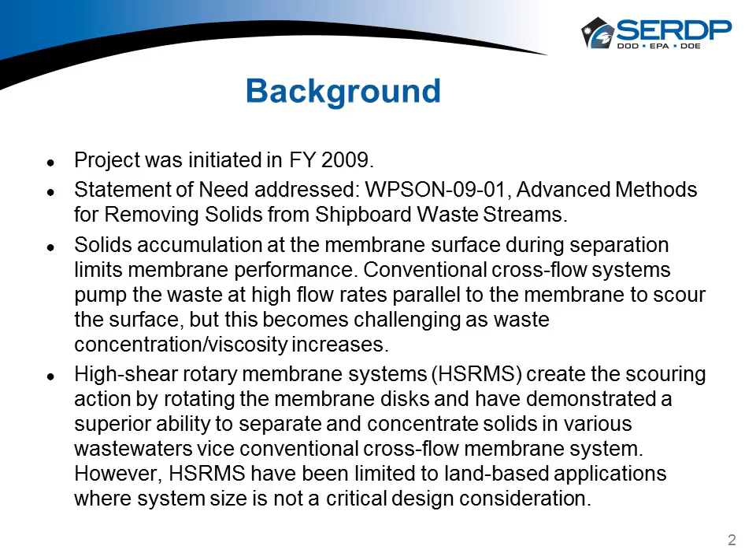Using what we had learned, we would conceptually design, fabricate, and test a prototype shipboard HSRMS that would incorporate whatever combination of backpulsing, continuous surface cleaning, and larger discs that would work best for the different waste streams. Our goal was to produce a prototype shipboard rotary membrane system that would have increased waste treatment throughput, a smaller footprint and space requirements, and also be potentially portable.

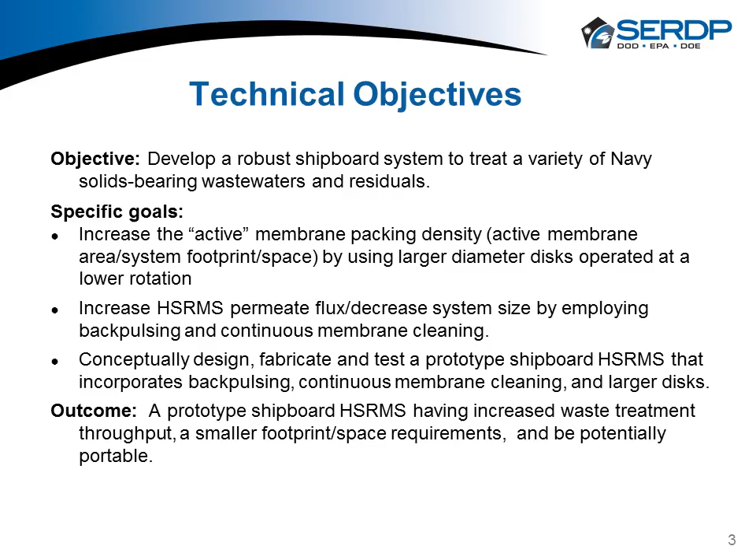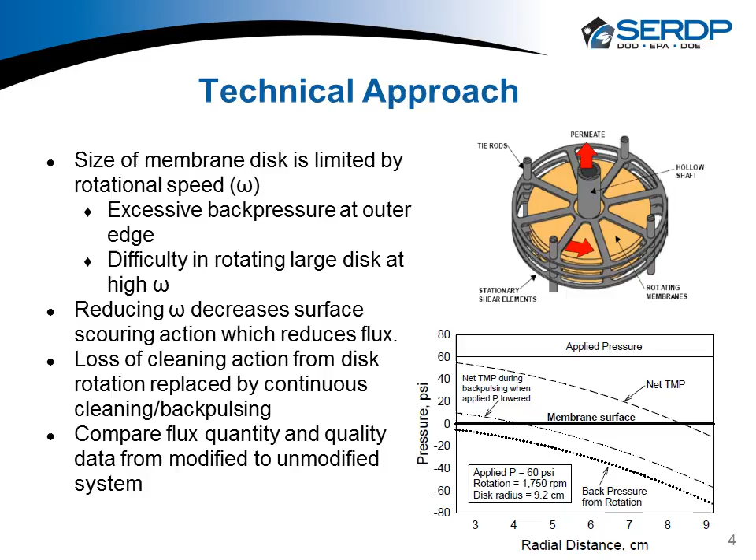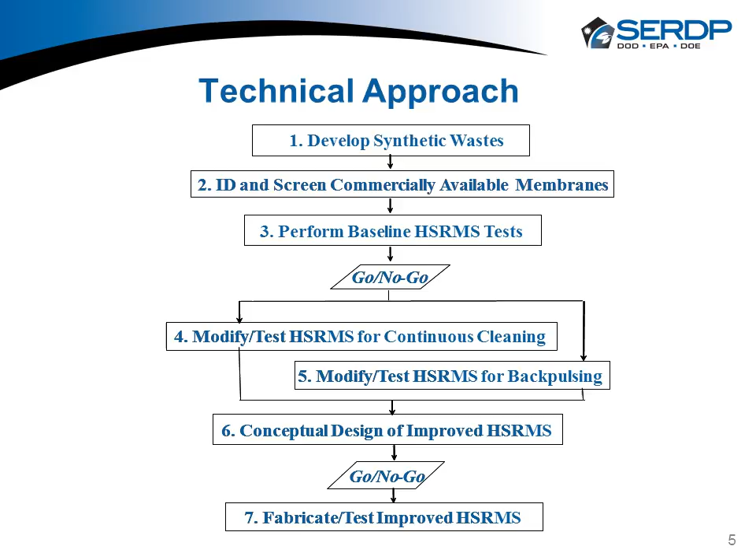Slide 5 shows the rough outline of our project. We started off with choosing the synthetic waste that we would evaluate our system on. We then identified and screened commercially available membranes. The membranes that showed potential moved on to high-shear rotary membrane system tests, baseline as well as the continuous cleaning and backpulsing. Taking what we learned from the previous tests, we then came up with a conceptual design of an improved rotary membrane system, and then we fabricated and tested a prototype of that.

For our technical approach, for each set of conditions that we were testing, we did a minimum of 3 runs. While we did these runs, the system was typically in recycle mode, where the permeate was returned to the feed tank. We cleaned the membranes between each run to return it to initial performance, and we used a 2-step process recommended by the rotary membrane system manufacturer, which is SpinTek.

Early on, we were doing separate runs for each condition, each rotational speed, each modification. Midway through the project, we realized that we could reduce the number of cleanings by switching to a rotation step-down method, where we start off at the highest rotation for a given set of conditions and then step it down, each time waiting for flux to reach steady state before switching to the next rotation.

The things we're measuring were permeate flow and quality. For permeate flow, we initially used a magnetic inductive flow sensor because our flow rates were high enough to be read. We verified the accuracy at the beginning of the project, and it worked well. But once we switched to the smaller discs later in the project, the ceramic discs, their permeate flow rate was too low.

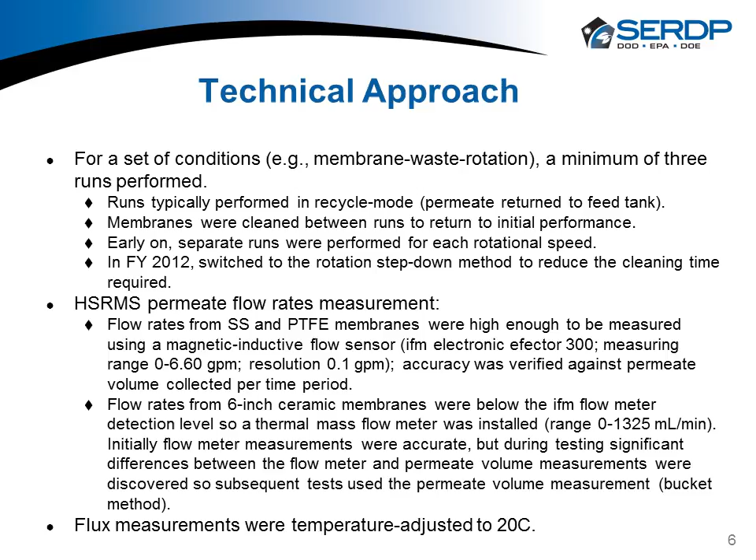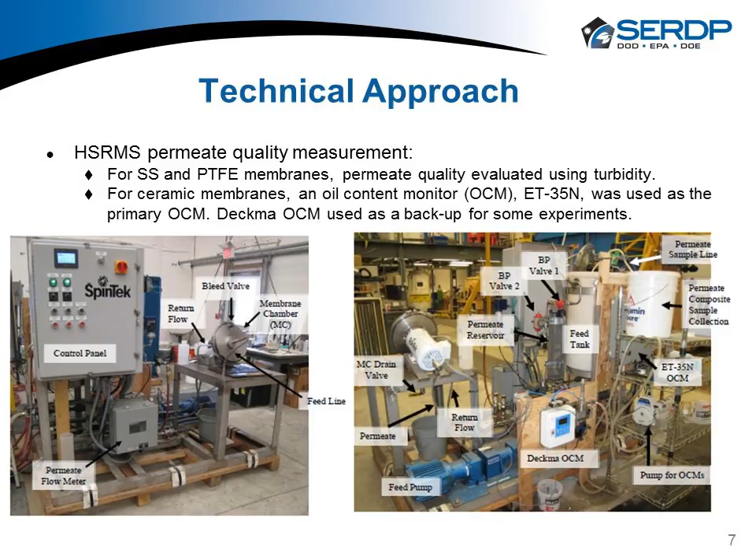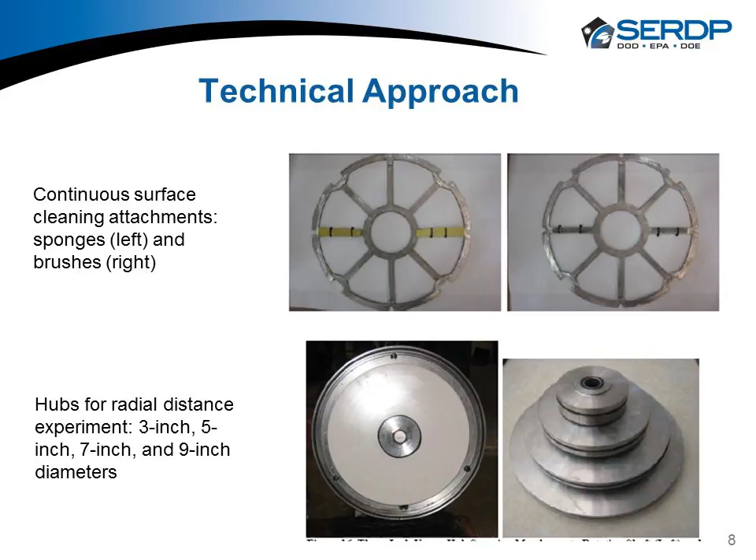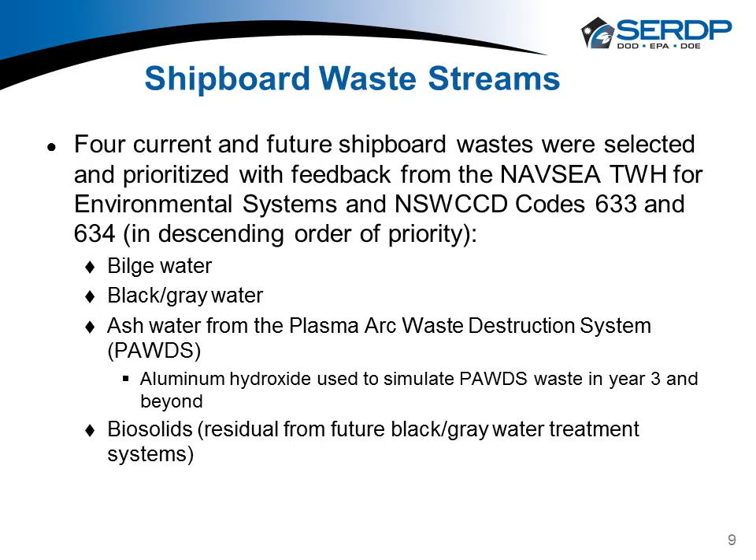Slide 10 shows some of the waste characteristics, the discharge limits, and also what the environmental tech warrant holder and Code 633 and 634 identified as the potential applications for the rotary membrane system.

For bilge water, they thought there could be two opportunities for it. It could either be used to treat bilge water to the discharge limit of 15 ppm of oil or less, or it could be an add-on to the current shipboard systems, further concentrating the oily effluent from the current systems.

For our test, we used the oil, detergent, and particles bilge water mixture that Code 633 uses to evaluate their systems. The recipe is shown there - that's what we call 1X. That was what we primarily used, although for some tests we wanted to see what a higher concentration would do, so we used 10X concentration, which is basically 10 times what you see there.

For black-gray water, they saw the rotary membrane system as a way to remove solids prior to the treatment system. For the PAWDS ash water, also looking at it as solid removal before discharging the ash water to the sea. And for biosolids, they saw the opportunity as being able to dewater the sludge that would come from future shipboard systems.

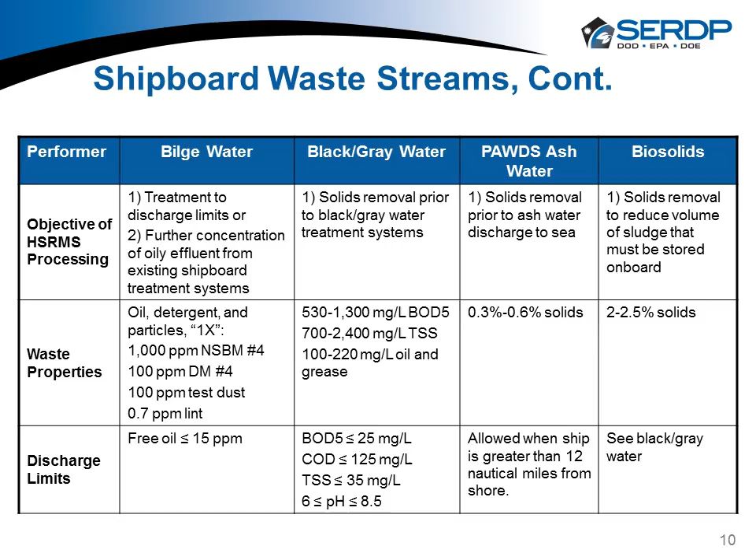Slide 11, we identified and screened a variety of membranes. For the first 4 membranes, the PTFE and stainless steel membranes, those are available as sheet membranes, and we evaluated them using a stirred cell, shown on the right. For the 6 ceramic membranes made by KERAFOL, they come as discs already, in 3 sizes, but only the smallest size, the 6-inch diameter disc, would fit in our rotary membrane system, so we screened them in the rotary membrane system using the 6-inch disc.

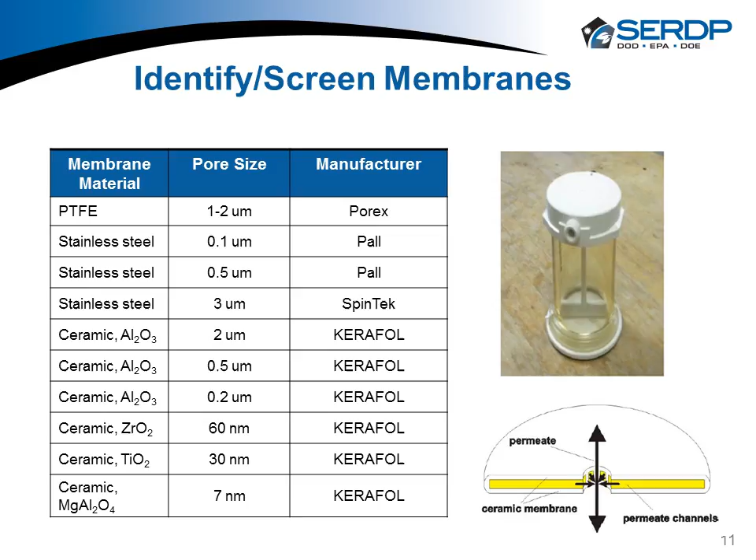Slide 12 shows the results for the PTFE and stainless steel membranes in the stirred cells, and as you can see, they all performed similarly and had good permeate turbidities. Based on that, we moved them all forward to rotary membrane system evaluation.

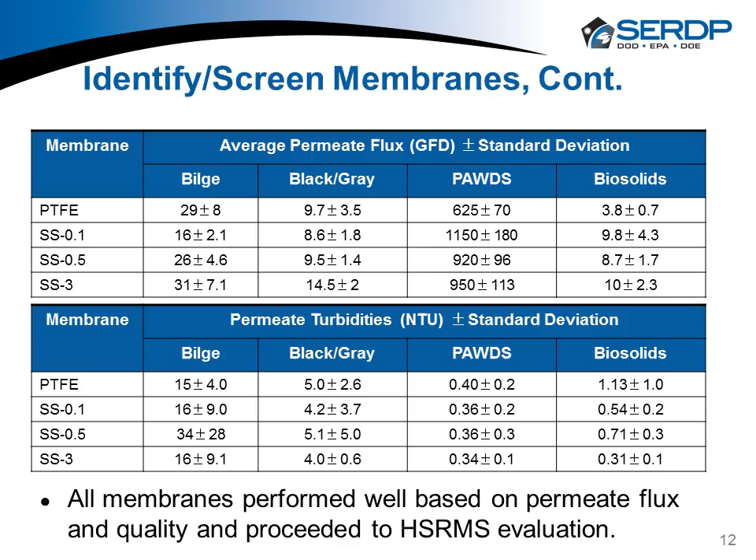Slide 13 shows some of the results from the 6-inch ceramic membrane. The graph shows the results of backpulse testing, which we rolled into our baseline testing. Based on what we were seeing, they all had fairly high fluxes - some of them had really great fluxes at different rotations. They all produced permeate that met the discharge limit of 15 ppm. But based on the fluxes we were seeing, how high they were and how consistent from run to run, we selected the 60 nanometer and 7 nanometer membranes to move forward to full-size rotary membrane system evaluation. So we special ordered a 10.5-inch membrane from KERAFOL.

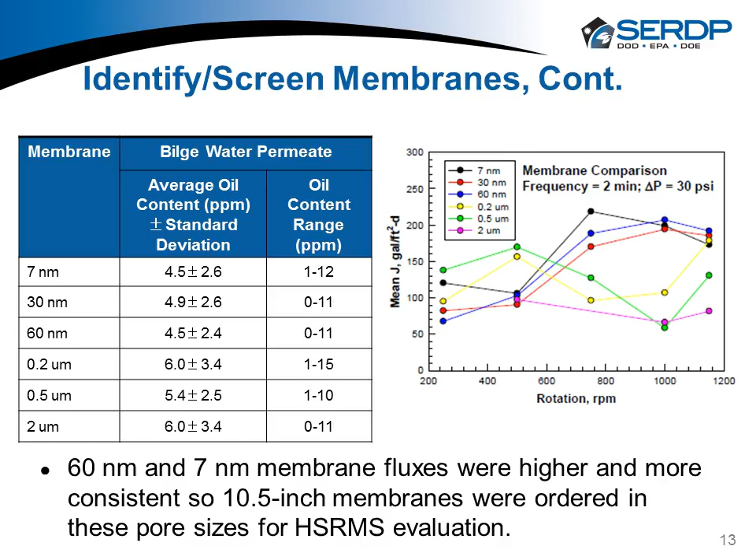Slide 14 shows the results of our continuous surface cleaning test. Overall, for all the membranes, the effective continuous surface cleaning really varied by membrane, waste, and rotation combination. For the stainless steel and PTFE membranes, we evaluated them with 1X bilge as well as the PAWDS ash water. We chose those because bilge is the high priority waste, and PAWDS because, being the most abrasive, we thought we would get a good indication if there was going to be a problem with membrane wear due to the continuous surface cleaning.

There were no problems with membrane wear. However, we did not see any improvement in flux with the sponges or with the brushes. As you can see below, the graph shows PAWDS with sponges and without sponges, and despite the huge difference in visual appearance of the membranes with and without sponges, there's no change in flux.

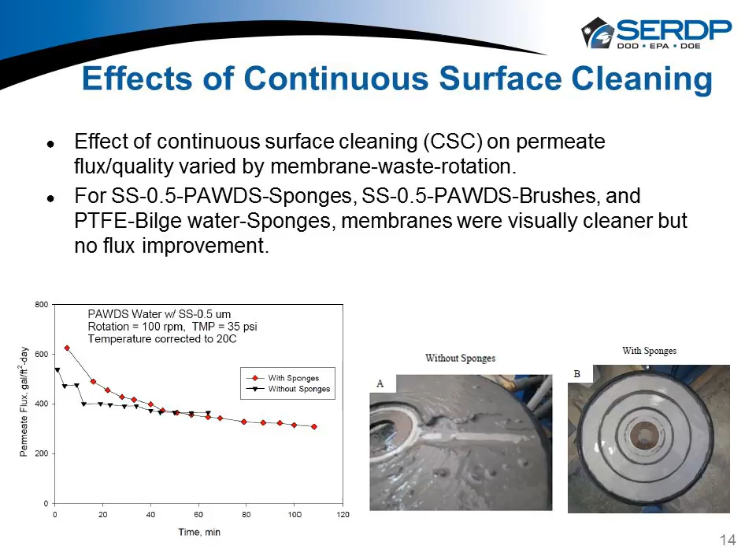Slide 15 shows the effects of continuous surface cleaning using the 60 nanometer ceramic disc to treat bilge water. If you look at the left-hand side graph, you'll see that we did tests with 2 rotations, with and without sponges, at 1150 RPM and 500 RPM.

The flux with sponges at 500 RPM was essentially equivalent to the 1150 RPM no-sponge flux, which shows that the loss of cleaning action at the lower rotation can be compensated for by using the sponges at lower rotations.

There was no improvement with and without sponges at 1150 RPM.

The graph on the right shows a longer-term experiment, a sort of concentration batch-down using sponges operating at 500 RPM. We started off with 1x bilge, and as time goes on, the flux steadies out at about 200 for most of the experiments, that would be all the symbols.

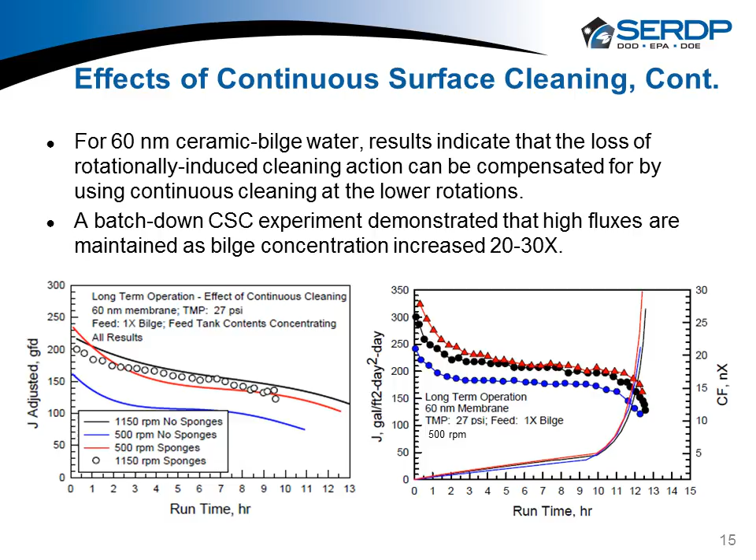So it seemed as though, I guess, that shows that we weren't seeing permanent fouling. It was something that could be easily removed with rotation. So we're not really sure why the sponges weren't doing as well for black water as they did for bilge.

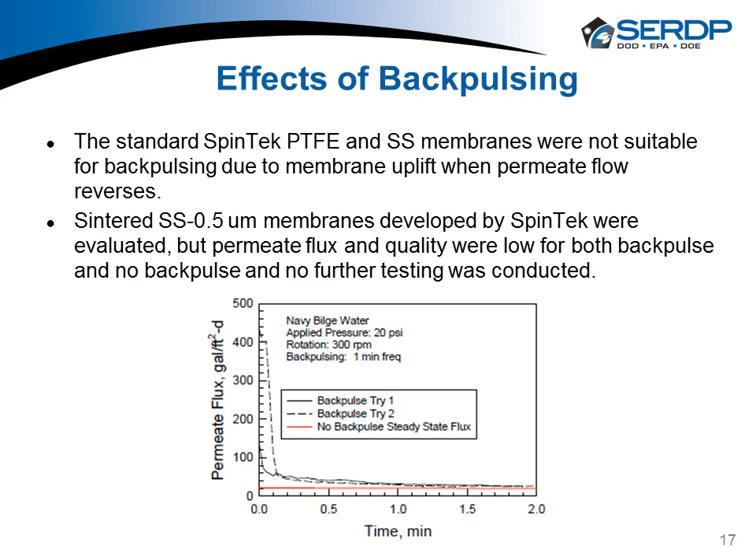For the ceramic membranes, we evaluated backpulsing with the 6-inch membrane. Our parameters were the backpulse net pressure, which would be the difference between the backpulse pressure and the net transmembrane pressure, with the goal of having it be overall negative across the membrane. Negative meaning that your permeate's going from inside the membrane to outside the membrane. We chose a backpulse duration of 2 seconds, and then we looked at different rotations, the effects of having a 2 second backpulse every 1 minute versus every 2 minutes, and then different backpulse net pressures, or delta P's, of 10 psi, 20 psi, and 30 psi.

The end result was that the delta P of 30 psi had the greatest flux benefit. We didn't see any differences in flux between a frequency of 1 and 2 minutes, so we chose 2 minutes just to minimize the amount of permeate we might lose during the backpulsing.

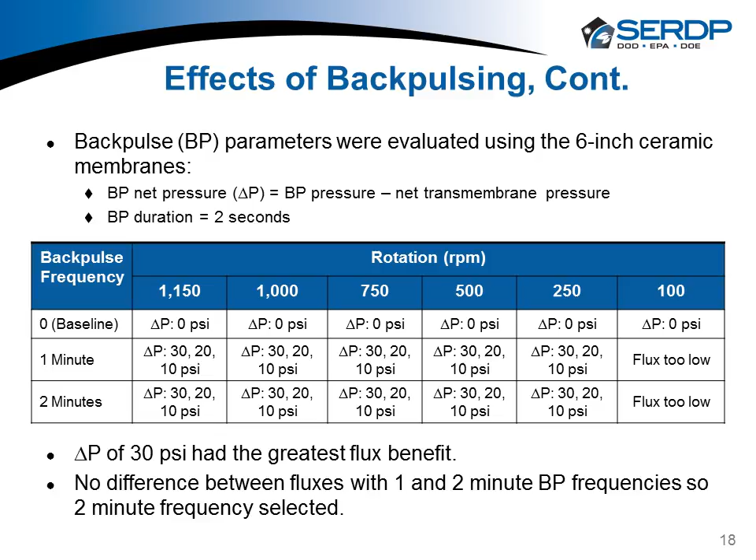For bilge water, we didn't see any backpulse benefit for either the 6-inch or the 10.5-inch 60 nanometer membranes. We tried doing a couple of different backpulse duration and frequency combinations to see if that would produce an effect. We also tried doing some runs with higher bilge water concentrations, thinking that maybe there just isn't enough solids to lift off, so we increased that. But for all those different variations, we still didn't see any backpulse flux benefit.

The graph on the right shows results for aluminum hydroxide, which we switched to as a sort of PAWDS surrogate because we could mix it up and control the concentration. For the aluminum hydroxide, there was a backpulse benefit at lower rotations, but not at higher rotations.

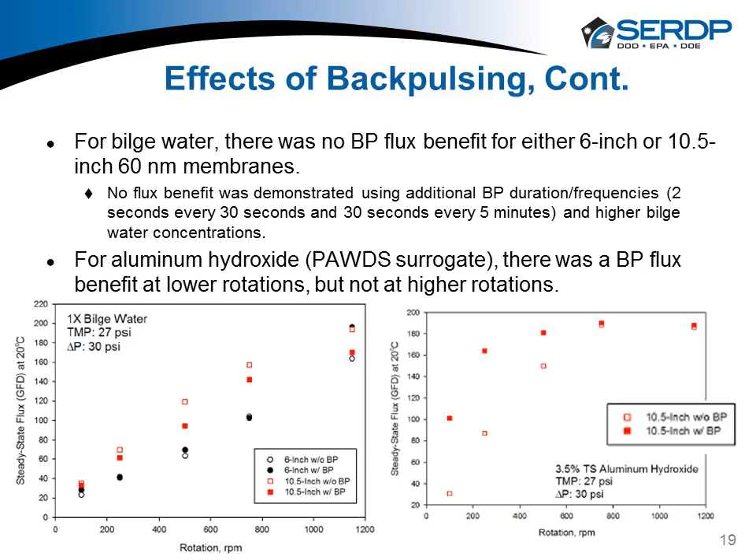Slide 20. These are results for black water and backpulsing. The left slide shows the backpulsing results by disc, the 6-inch versus 10.5 inches. As you can see, for the 10.5-inch disc, there was a backpulse benefit at pretty much every rotation. At the 6-inch, the benefit increased as rotation increased.

The slide on the right shows the backpulse benefits by inner and outer membrane areas. The inner area would be represented by the small disc results, and for the outer area, we did some calculations to get the fluxes for the membrane area from a radius of 3 inches out to 5 1/4 inches, the area outside of that 6-inch membrane. For the inner area, there was a slight flux benefit, and it increased with increasing rotation. For the outer area, there was a bigger flux benefit, but it decreased with increasing rotation.

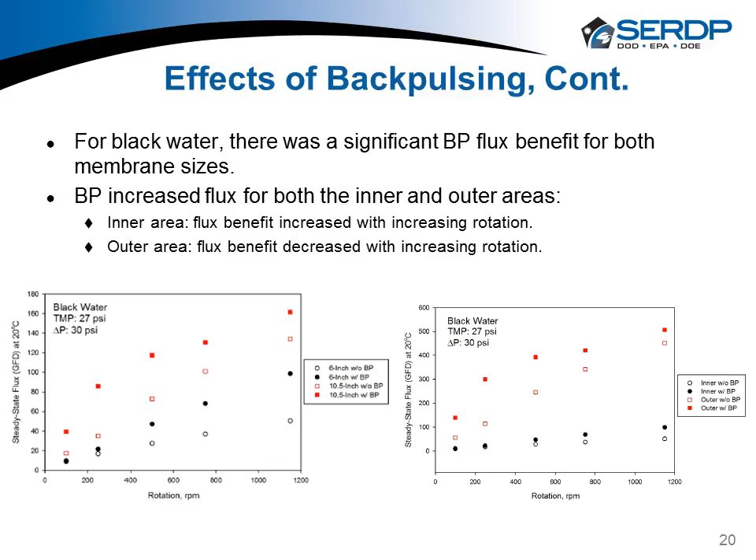On slide 21, we started to look at the effect of radial distance and rotation on flux, based on what we were seeing between the 6-inch and the 10.5 inch diameter disc.

For bilge water, this is where we used hubs of different sizes to block off different regions of the membrane. Flux increased with rotation for all the membrane regions. If you were to just put your finger at 100 RPM at one of those rings and follow it as the rotation increases, it increases for every little bullseye section. But when you start looking at a single rotation and comparing fluxes for the different areas, you start to see some function with radial distance.

So we analyzed the data using a power law relationship to relate the effect of the Reynolds number and shear rate on flux. Then, using the equations we came up with, we predicted what the flux should be for a 14.7-inch disc, the largest stock size that TerraFall produces.

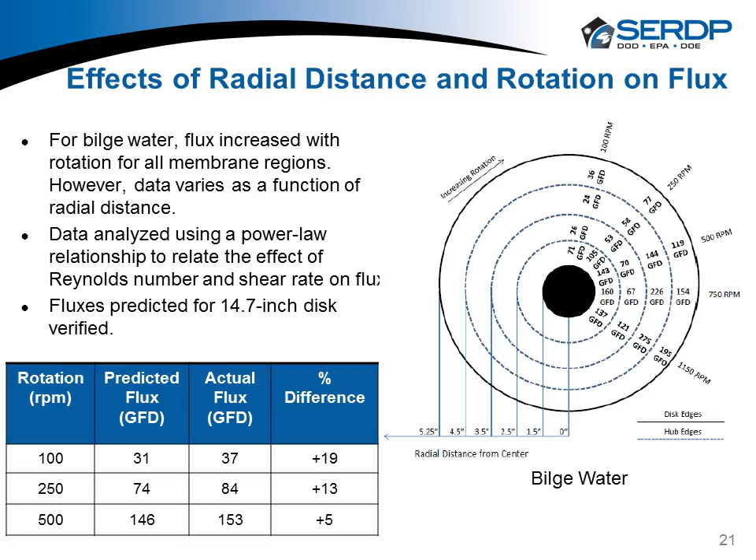We bought some of those 14.7-inch discs and also built a new, larger membrane chamber, then repeated the test. As shown in the table, our actual fluxes were a little bit higher than the predicted flux, with the percentage anywhere from 5 to about 20%, depending on the rotation. We saw probably the biggest improvement at a lower rotation.

So on slide 22, same analysis for black water. Again, we see the flux increase with rotation for all the membrane regions, and we also see that variation of flux with radial distance.

So we did the power law relationship analysis, predicted the fluxes that we thought we would see for 14.7-inch membranes, and then did the test, and the results were not what we expected. This is where we had something that we didn't expect.

We had used waste from 633's liquid waste lab to do the earlier test, but then when we did the 14.7-inch disc, we weren't able to get any waste from them. They weren't doing any testing at the time, so we got waste from the Little Patuxent River wastewater treatment plant, and we made sure that the percent solids was in the same range as what we'd used previously, thinking that's the main criterion. But we still got unexpectedly low results.

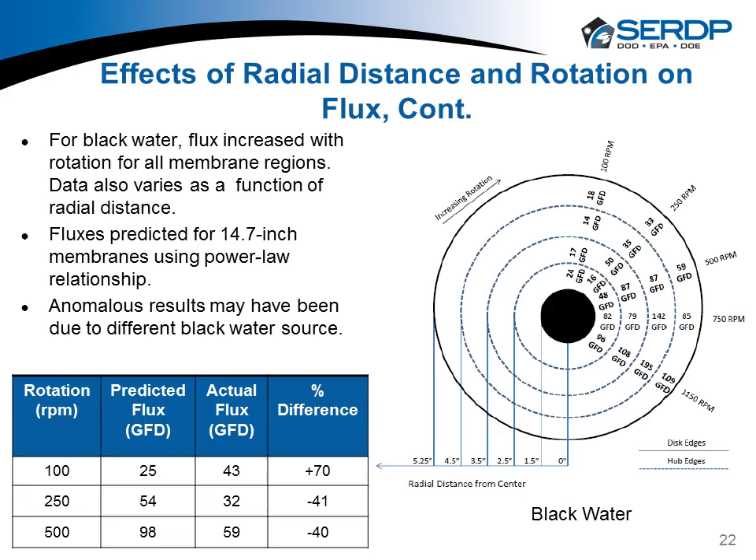We don't know what it is, but we feel that the membrane prediction should hold, but we weren't able to repeat the test to verify that.

On slide 23, we did several additional experiments. It was brought up in a meeting with the oil pollution abatement team in Code 633. They wanted to know if the ability of these membrane discs to exclude oil was due to them actually excluding the oil, or them excluding the oil which had absorbed to the solid.

So we did runs with bilge water of different concentrations, with and without solids. And as the graph on the top right shows, there was no effect. So we concluded that the membrane is actually excluding the oil droplets, whether or not they're attached to a solid.

One of our goals was to also make sure that we're not giving the ship a system that needs a lot of different chemicals to clean it and things like that. So we obtained some Kleen MCT, which is what the shipboard systems use to regenerate their membranes, and we used that as our one-step cleaning process.

There was a slight reduction in performance after runs when we had cleaned with MCT versus our two-step process, but we thought it was a small enough difference that the overall benefit, due to the reduced time and residuals, would be worth it.

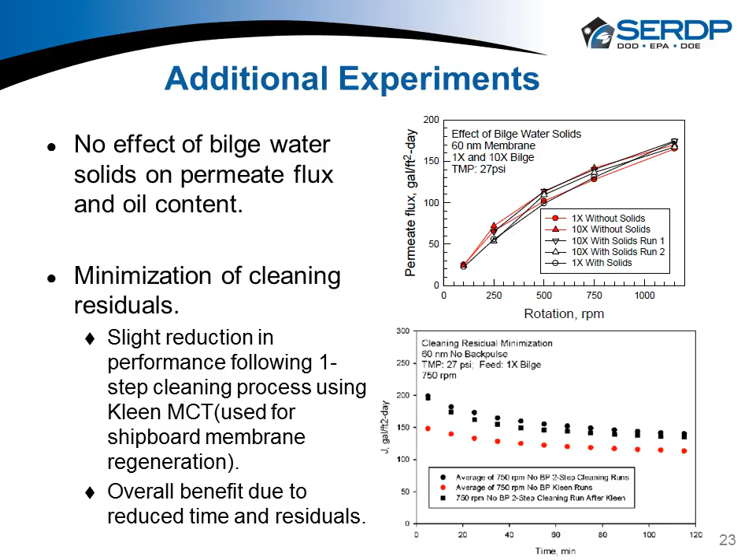For PAWDS, the membranes with the larger pore sizes performed better. But one thing we didn't do was run the 2 micron ceramic membrane that Terafol makes with PAWDS - we evaluated it initially with bilge and some other things, but didn't actually run it with pods. So we assumed that the 2 micron ceramic would be similar in performance to the stainless steel.

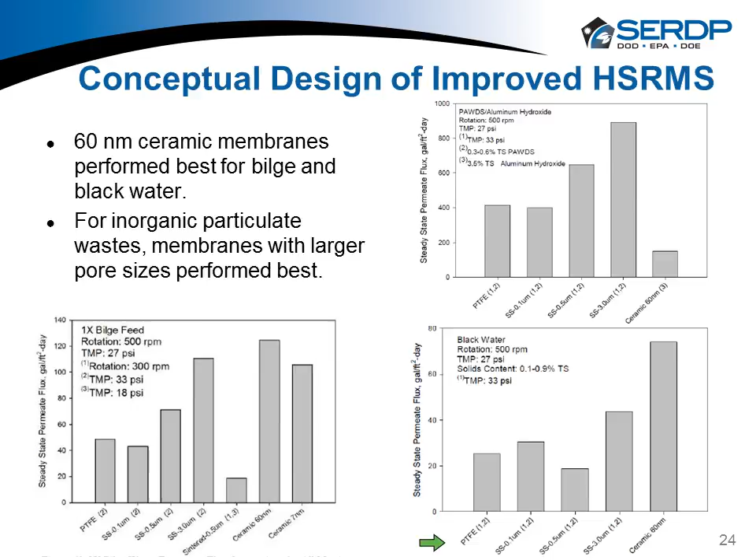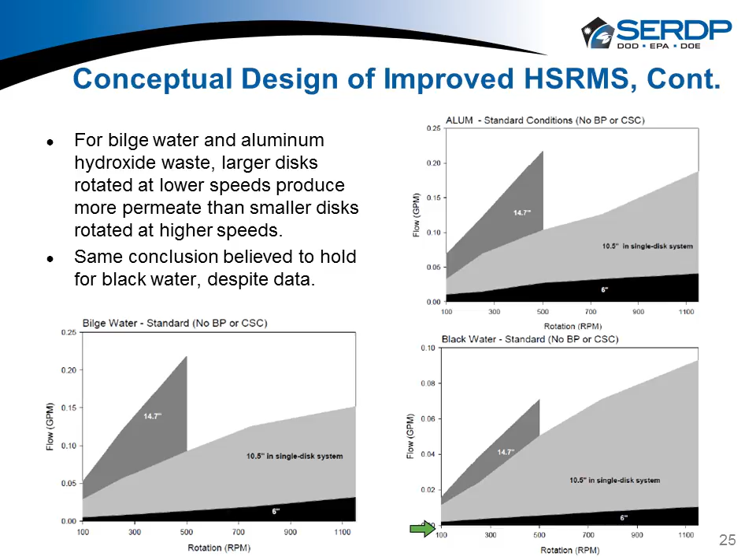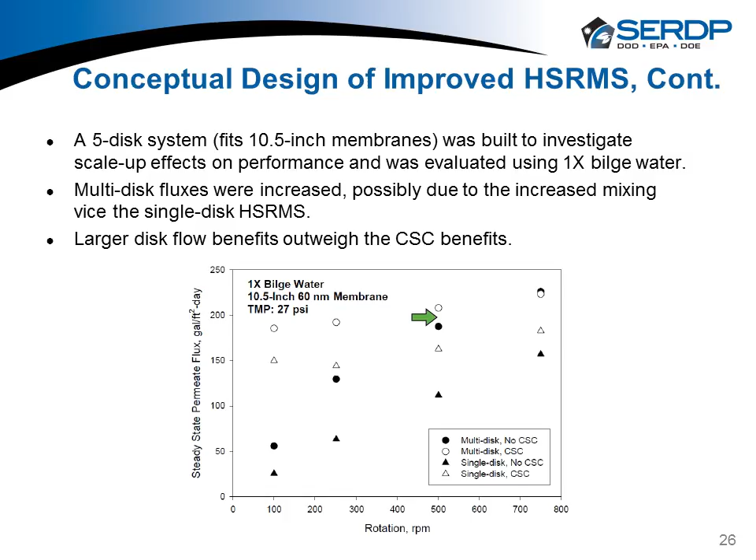And since we saw the huge benefit from continuous cleaning at the smaller disc, the 10.5-inch disc in a single disc system, that benefit was reduced when it was in a multi-disc system. So it looks like once you scale up to a full-size system, the larger disc flux benefits will outweigh the benefits you get from continuous surface cleaning for bilge water.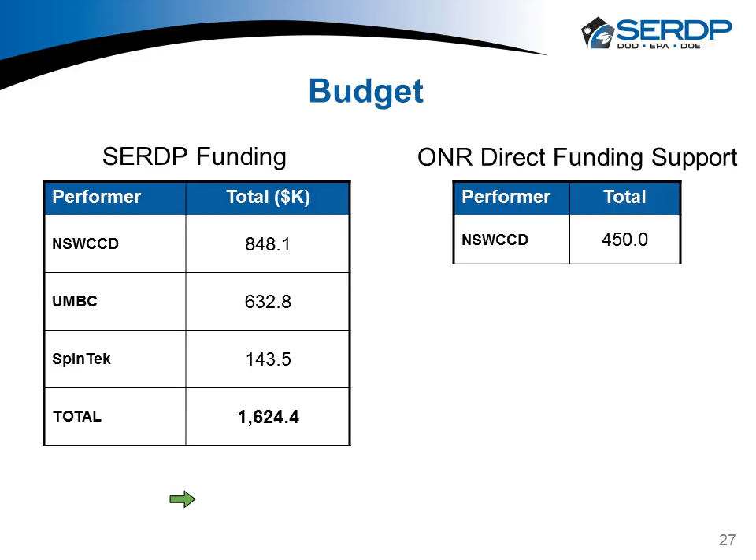I'll move on to slide 28. For our transition, we always envisioned that there would be a place for the rotary membrane system in the Navy shipboard. In this past round of ESTCP, Code 633 submitted a proposal to demonstrate a rotary membrane system for shipboard bilge water. Phase 1 of that proposal was funded, and that is just getting started. The demonstration was endorsed by the tech warrant holder for environmental systems.

Throughout the project, we've made sure that we've kept in touch with the wastewater management branch, the solid waste side for the pod waste, as well as the tech warrant holder and the NAVSEA engineering managers for these systems, to make sure that as the project evolves, we're still in line with what the shipboard community sees as our place. We had project updates on our results, and they gave us feedback, as I showed with the solids, no solids test, and we wanted to make sure that we addressed any of their concerns up front.

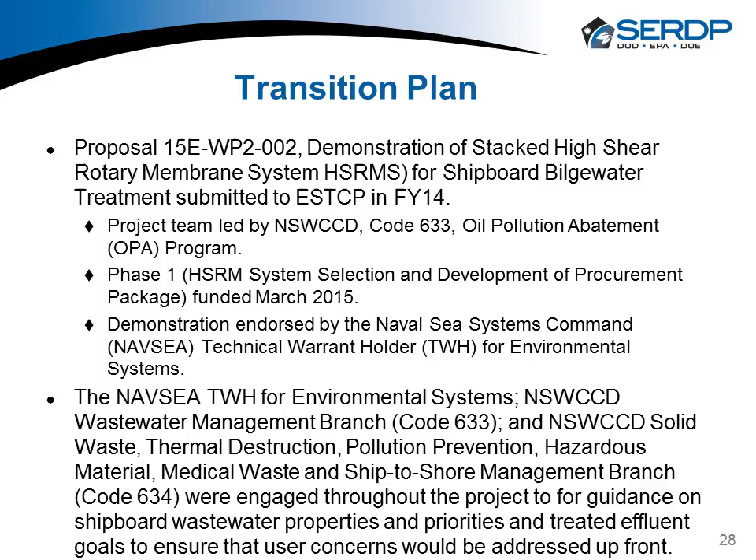So in conclusion, we did demonstrate that the rotary membrane system technology can effectively treat a variety of solids-bearing Navy wastewaters. We tested it on oily waste, biological waste, and particulate waste, and it did well with all types of waste.

We definitely developed a large body of data and a greater understanding of the impacts of flux enhancements such as continuous surface cleaning and backpulsing, the effect of disc diameter, rotation, membrane type, and turbulence enhancement, as well as system scale-up, and the effect of all of those parameters on minimizing the system footprint and volume. So I think what we've done is produced a body of information that will enable people to take the technology and make decisions and tailor the system to their particular type of waste.

It's really hard to summarize our actual technical results because it really varies by several different parameters. But I think overall we did demonstrate that larger membranes rotated at lower speeds may be the best way to increase waste throughput while minimizing system size.

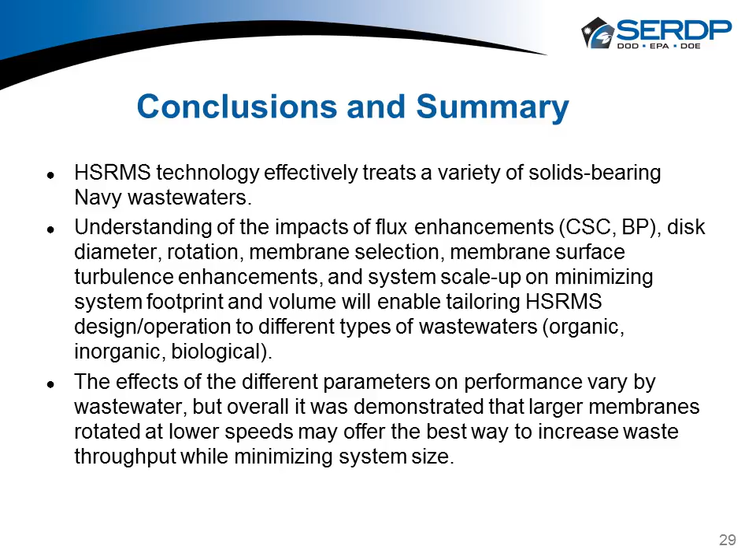Tracy, this is Rob. At this point, what I'm struggling with is, first of all, do you think this is a system that would go on existing platforms or would have to be built into new platforms? And depending on who's asking the question, if someone said to you, what should I put on my boat, could you, with the knowledge you've gained in this project, come up with here's your best choice based on money and the various parameters that you've discussed?

Right. Well, I think we'd be most comfortable recommending a system for bilge water just because we spent the most time testing on that wastewater. And certainly the rotary membrane system is something that could go on, I think it could be retrofitted to existing ships. Based on size, it's something that could be hatchable, and they already have space designated for their current shipboard system, so if we're just replacing those, we'd definitely be able to retrofit it. And I think it could easily be integrated into new shipboard design.

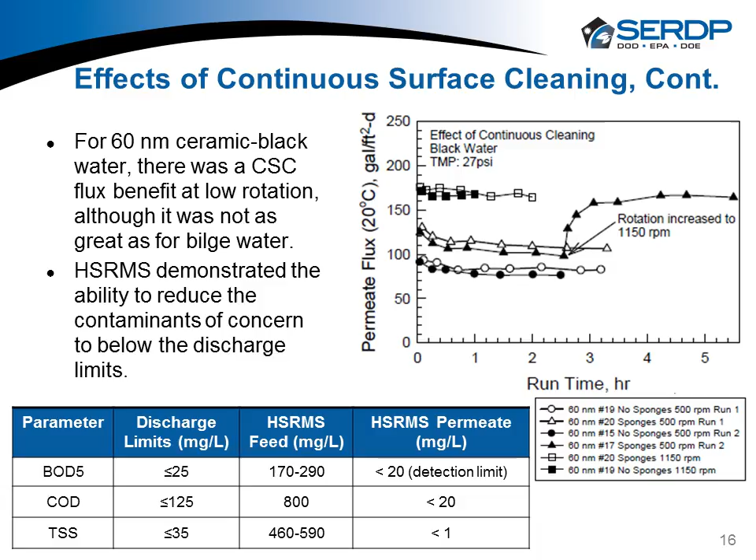Okay, I'm listening, and if I don't hear anything else, I'm going to say thank you very much, Tracy. Appreciate the effort you put into this. This was a successful project. Great, thank you very much, Rob.